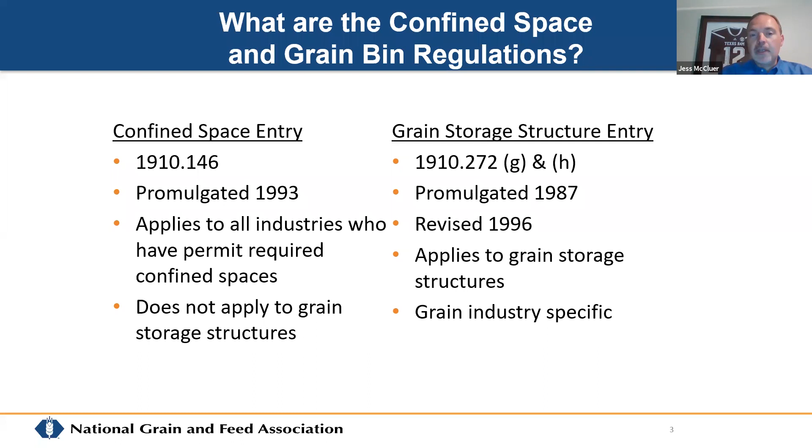And many of you are aware that individual companies have their own policies too. Many companies may have their own confined space entry policy that may apply to grain bins, but the purpose of this presentation is just comparing the difference between the OSHA regulations.

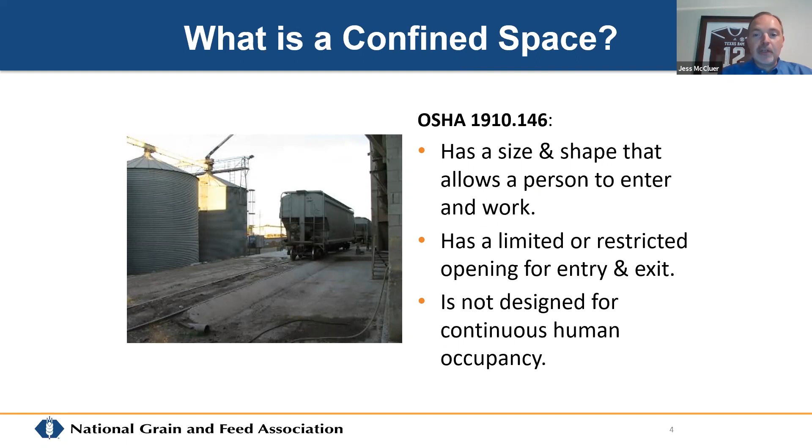So 146 applies where the space itself has a size and shape that allows a person to enter and work, has a limited or restricted opening for entry or exit, and is not designed for continuous human occupancy. There are many different types of structures found at grain handling locations where this could apply. One that there's been much discussion about is boot pits and how those can vary at different facilities, but there are also other potential confined space locations, ranging from tunnels to receiving pits to manholes.

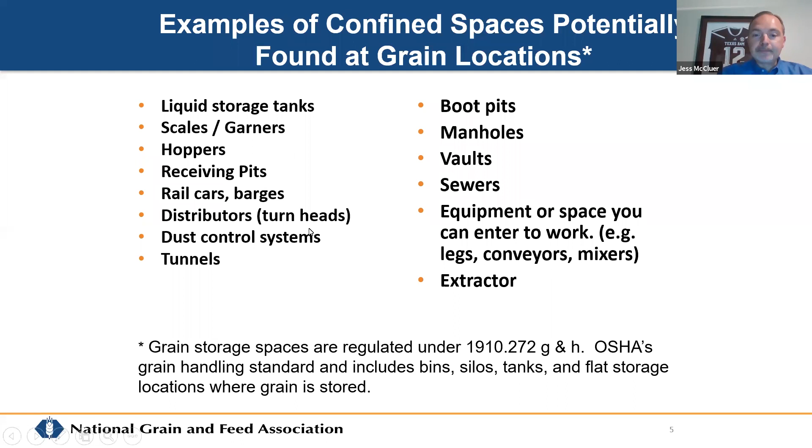So a non-permit confined space. As I mentioned, a non-permit confined space doesn't contain, or with respect to atmospheric hazards, doesn't have the potential to contain, any life-threatening hazard. These are maybes when you're dealing with a non-permit confined space: a boot pit, a tunnel, a basement, a control room, these different parts of the facility.

And the reason these are maybes is that oftentimes OSHA may have a different interpretation. Once again, this comes back down to an individual facility's process that they use to designate whether this is a permit or non-permit confined space.

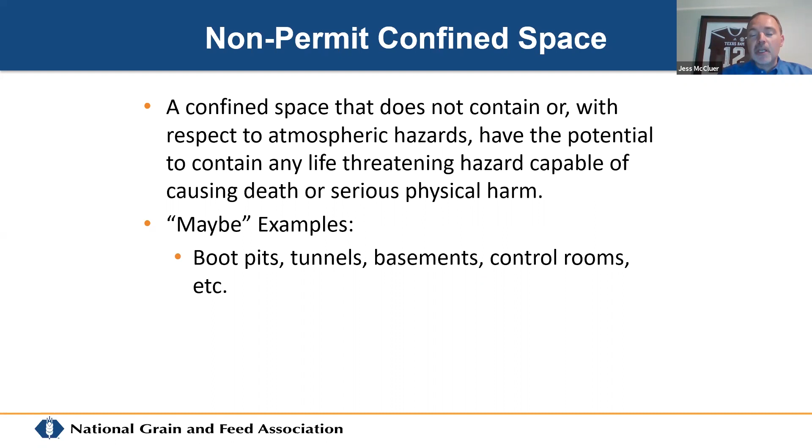At NGFA, we have numerous educational materials, guidance documents, and so forth that specifically deal with these sections, but I wanted to provide this as an example. A permit-required confined space must contain or have the potential to contain a hazardous atmosphere, has the potential to engulf an occupant, has inward converging walls or floors that slope downward, or any other characteristics recognized as life-threatening.

So all confined spaces must be considered permit required until proven otherwise. So basically what this is saying is that, the difference between a permit and a non-permit required confined space is that from the standpoint of doing the evaluation, you should consider the confined space to be permit required based on these conditions listed above. If they don't meet these requirements, then it would be a non-permit required confined space.

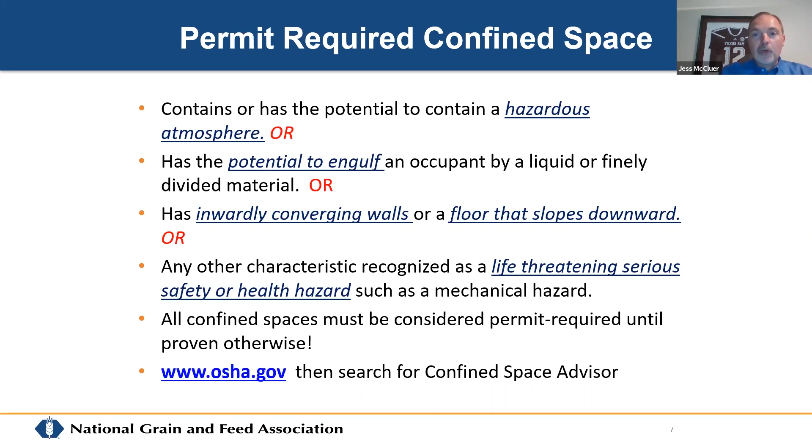And there's also numerous information available on OSHA's webpage. If you go to osha.gov and look for the Confined Space Advisor, it's an electronic tool where you can put in these types of situations, these types of conditions that you're dealing with, and it'll provide you with some guidance regarding that classification.

So these are the different types of potential hazards within a confined space: atmospheric, mechanical, electrical, obviously within grain bins, engulfment hazards, falling objects, temperature, so forth, conditions that may exist or develop, oxygen deficiency, lockout, weather, and so forth. So these are all the hazards, as previously mentioned, that must be considered when you're classifying the confined spaces, whether it be permit or non-permit required.

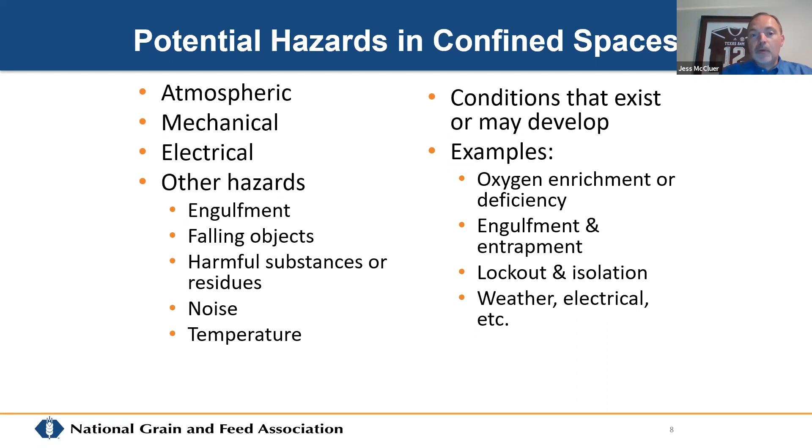So basically it was designed to educate the inspectors on 272(g) and (h), the differences between those particular sections of the standard, and how they would apply. So it's a very informational document that has a flow chart attached with it. We do have that information on the NGFA webpage and through our training material, and that's also, as I said, available on the OSHA website too.

Atmospheric hazards: obviously the oxygen concentration level is a very key issue. You can either have too much or too little oxygen, carbon monoxide, hydrogen sulfide, all of these factors primarily having to deal with the quality of grain. Obviously the pesticides with phosphine, and the dust thickness that can obscure vision. These are critical parts of atmospheric testing, and this is often what leads to some of the challenges the industry has had in dealing with OSHA regarding the classification of boot pits as a permit required confined space instead of a non-permit confined space.

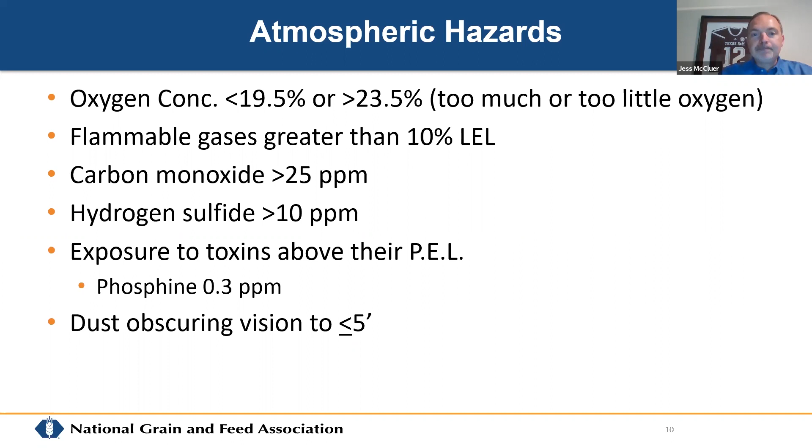A written confined space program. So obviously an evaluation of all the confined spaces. When OSHA inspectors come into a facility, one of the first things they always look at is whether you have a safety and health management program, do you have a housekeeping program? Having a written confined space program is also very important.

And so having a list of the confined spaces, the evaluations that have been done, basically the checklist that you've gone through to make that determination. What are the factors that you've considered to classify it as a permit or a non-permit required confined space, and having the signage in the particular areas of the facility where a confined space permit is required. All of this is very important information, not only for the safety and health of the employees and the general atmosphere of the workplace, but also very helpful if OSHA were to come in to do an inspection.

The confined space entry training requirements. Obviously, new employees must be fully trained before being part of any entry process, and retraining experienced employees. Those employees involved in working or classifying confined spaces may receive training annually or according to the company's policy. So may receive training annually doesn't necessarily mean that it's an OSHA requirement to have confined space training annually, but that is something if that's part of the company's policy.

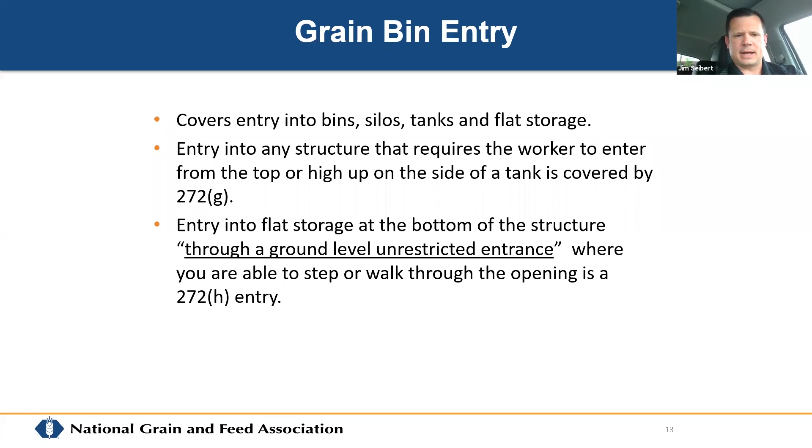So next slide, please. So entry into this grain storage. The first two bullets may raise some red flags for some of you, and that's understandable when we say may issue an entry permit or may evaluate the atmospheric hazards. A lot of you, hopefully it's been ingrained that that's something that you're going to do every time.

However, according to paragraph G1I, the employer shall issue a permit unless the employer or employer's representative who would otherwise authorize the permit is present during the entire operation. So that's the caveat to the entry permit. An entry permit is going to be issued and executed unless the employer or the authorized person or representative of the employer who would grant permission is going to be available throughout the entry process.

And then under the may evaluate atmospheric hazards, that's under paragraph G1III. Atmosphere shall be tested when the employer has reason to believe there's a presence of combustible gases, vapors, or toxic agents. Additionally, it shall be tested for oxygen unless there is continuous air movement before and during the period the employees are inside.

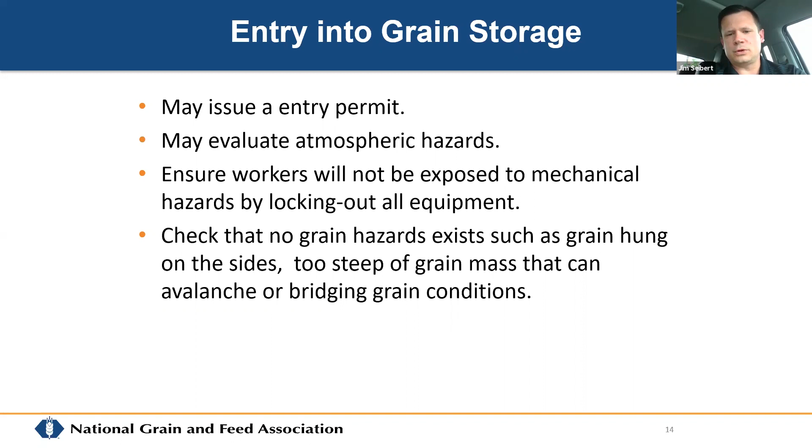Spotlights from the port of entry are encouraged. That way you can see the top of the bin, you can see all sides of the bin, sticking your head through the entrance to make sure that there's no grain directly above or hung up, and make sure that the condition of the grain on the inside doesn't pose a risk to your entrance. Next slide, please.

So we want to ensure there's no engulfment hazards. We want to turn off those reclaim conveyors or lock them out. Same with turn heads and distributors. So with that locking out, the standard also says you could block. In some instances, that could mean if you have a sump hole with a conveyor going underneath, or a subfloor auger, grating installed above those is a block that would reduce the risk of an employee coming into contact with that equipment.

So walking down grain is prohibited within the OSHA standard for both paragraphs G and H. Workers must wear a full body harness and lifeline when on grain over waist deep, and be secured so they cannot sink into the grain any further than waist deep. There's an exception where the employer could demonstrate the protection is not feasible or creates a greater hazard by wearing it. The employer can provide an alternative means of protection, preventing the employee from sinking further than waist deep.

So that specific point right there, having witnessed a situation like that in bins where you may have thermocouple cables, temperature cables inside of the bin, and if you're entering from an unrestricted side and that's your recovery method, especially with multiple entrants into the same bin, say a large bin at clean out time with 6, 7, 8 employees going in, multiple cables create entanglement hazards that could get an employee into a precarious situation. So the burden of that proof is on the employer. And so on that separate note, I provided the exception to that.

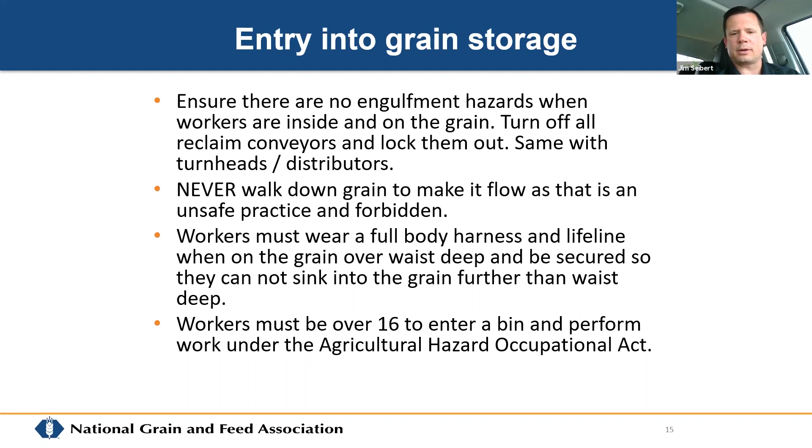So last bullet, workers got to be over 16 to enter a bin and perform work under the Ag Hazard Occupational Act. Next slide, please.

So standby observer must serve as the attendant, ensure proper practices are followed to help the entrants, monitoring conditions, and keep the worker secured. Also, they got to be trained in rescue procedures and notifications for obtaining additional assistance if needed. So the observer is not to go into the space and conduct recoveries of the personnel in there. So they're on the outside to monitor both the internal and external conditions, and be ready to take action should a situation present itself.

Also, if a worker's on the inside of a bin and grain is moving and people are shoveling and cleaning out or brooming, more times than not, they are able to see things a little bit better when a worker is focused in an area. Employee got to be trained in hazards of engulfment and avoiding mechanical hazards, and that training's to be given annually or when there's changes in a job assignment.

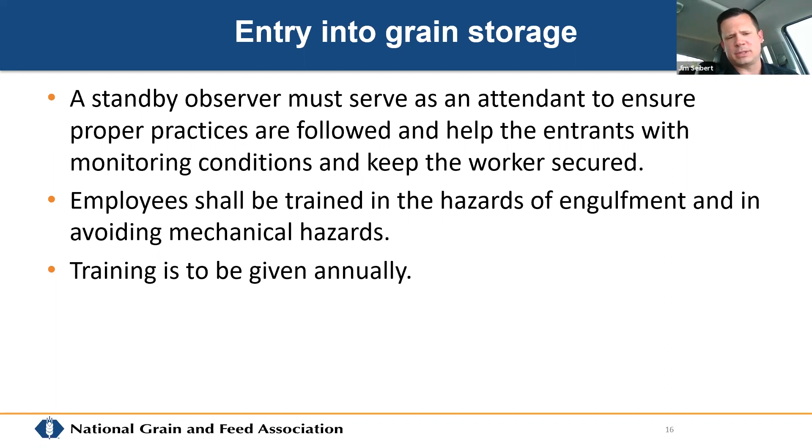So if you're onboarding and you're training employees to be an observer on the outside or an entrant or an entry supervisor, those three different positions on all grain entries, they've got very specific different duties. And so some companies would deem that each one of those duties is different, of different training and different testing to qualify for those positions. Next slide, please.

So if you're entering a bin, any type of grain above the grain, you're going to follow G. If you're entering at the bottom through unrestricted ground level opening, that is paragraph H. You can turn on aeration or use forced air fans to ensure there's no question about atmospheric issues. And that's a pretty common practice.

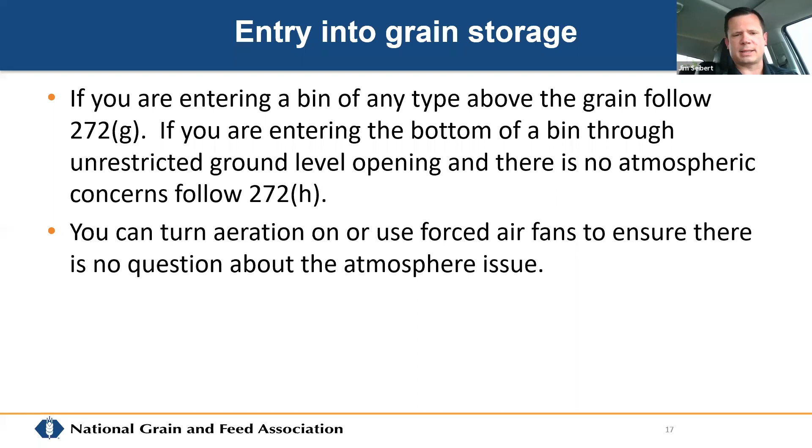You can take a space that does have issues, and by using fans for a period of time, you can get fresh air inside of the bin. Those are pretty common practices and ones that are encouraged. Next slide, please. Okay, so these are the pictures I was talking about earlier.

A 2-ring door, 5 foot, is available on most new tanks. And you can have your company's engineers or outside engineering firms take a look and provide these different types of doors that really provide easy access to and from. And that's you identifying hazards.

If the manhole, if it's an 18 or 24 inch hole that's halfway up the side of the tank that you have to be on a ladder to get to, and then you're squeezing through a hole before you come to another ladder and have to go down, there's hazards that are in that specific situation.

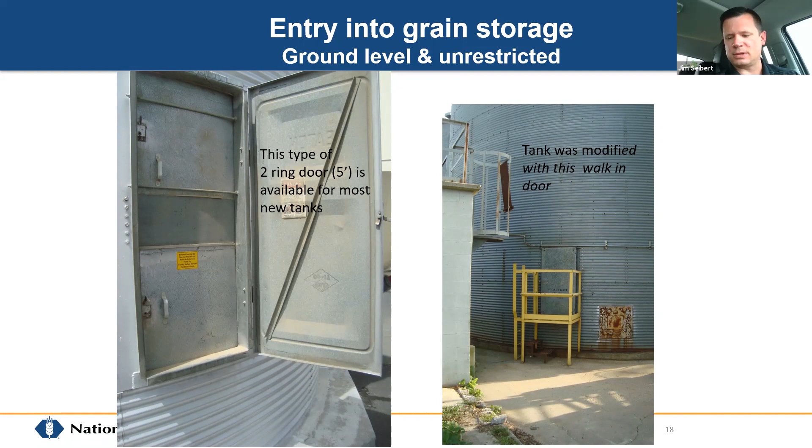If your site is able to have these types of doors, you can change hazards through these engineering controls, and just take a look at those options, because there's plenty of companies out there that can do this for you. Next slide, please.

All right, so education and training. I just wanted to highlight that on the ngfa.org/safety page, there's 2 specific bin entry safety videos that the NGFA has produced over the past year. One is on just bin entry safety in general, takes you through the beginning steps, the permitting process, testing, and the lockout, and all the processes.

It's a short video, about 5 to 6 minutes, that really highlights those main points prior to an entry. And then the second video, the NGFA, we believe that safe bin entries begin on the farm, and on the farm meaning grain quality control.

Engulfments, that's a direct reflection of grain quality, out of condition grain, and creating those hazards inside of a bin, and as well as engulfments are directly tied to equipment being operated while inside of a bin. So those 2 videos really address those points.

Training and education continued here on the same page. There's a whole slew of safety tip sheets. You can kind of see hazard communication, proper glove selection, creating emergency action plans, lockout, tagout. And then we have a guidance document for confined space and boot pit evaluation for grain elevators. So you can utilize this document, and that will help you conduct assessments at your facility for those spaces. This is non-permit required, this is a permit required confined space. So we encourage you to take a look at that.